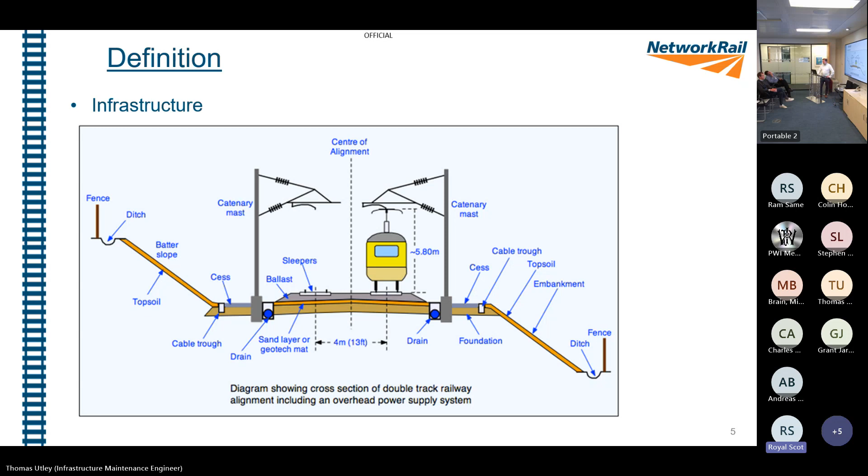So what do we mean by resilience? Well, as you can see, resilience means many different things to many different people. The definition of resilience in the dictionary is the capacity to withstand or to recover quickly from difficulties, in effect, toughness. Now, in infrastructure management, we are very, very good at trying to redefine that.

In the 2007 flooding report, Sir Michael Pitt defined resilience as the ability of a system or organisation to withstand and recover from adversity. As such, a resilient organisation is one that is still able to achieve its core objectives in the face of adversity and for a combination of measures. The UK government, in current infrastructure, defines it as activity to prevent, protect and prepare for natural hazards.

There's another definition, which I got online: resilience to infrastructure may be interpreted simply as robustness of a structure to withstand hazards. However, this introduction sets out and explains a number of interfaces which a narrow definition could conflict with or miss opportunities to reinforce wider resilience within infrastructure systems. So I think the key to understand here is it means lots of different things to lots of different people.

As a customer on a train, with resilience you're really worried about whether the service can run when there's problems and you can get home in the least amount of time. To infrastructure management companies like Network Rail and London Underground, it's really about running a service when things aren't optimal and making sure we can do it safely. So there are lots of different definitions.

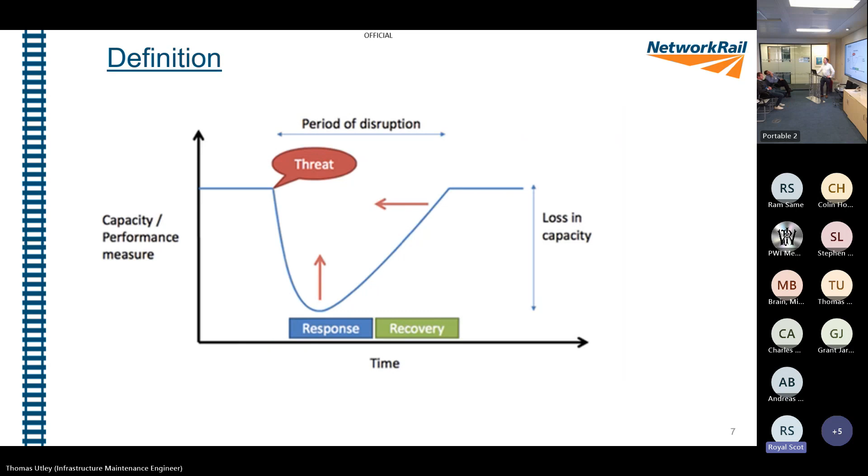Now, this is fine in the short term, but as we'll go on to see, if we do this over and over again in the long term, it does cause you problems, because over a period of time, you see a real decrease. Now, that might not be obvious, but eventually it does cause real problems with infrastructure, and you end up with a big glut of work that you're not planning to do.

So what does infrastructure need to be resilient to? Well, I've tried to come up with some key points. So the key one, and the one that's on everyone's agenda at the moment, is climate change. So we are seeing a huge change in our climatic conditions, and we need to consider not only how the infrastructure behaves in the climate we have now, but how it's going to behave in the future.

There's also natural hazards, so things like large bodies of water, unstable slopes. So again, we manage them now in a certain way. It's important to consider how we manage them going forwards. There's also more left field things like disease. So we've all seen the effect COVID has had on the railway. That's had a real effect on its capacity, and we are still, I think, in the recovery phase of that now. So it's important to consider as a system how we can recover from that.

And also migration. So the way people are living their lives has really changed. So have we got a railway that's really going to survive and can really perform to support that? There's also a number of man-made challenges. So I'll go on to talk about the pain of component failure and how we're maybe not doing as well as we should be with that. And there's some good scare photos later on.

There's the everlasting threat of terrorism, which is really linked to ICT failure and cybercrime. So we are seeing more and more reliance on computers to run our railways and removal of the human element. So that does have lots of benefits, but it also has quite a lot of risk it's imported into the infrastructure. And again, there's the change in behaviours and demand.

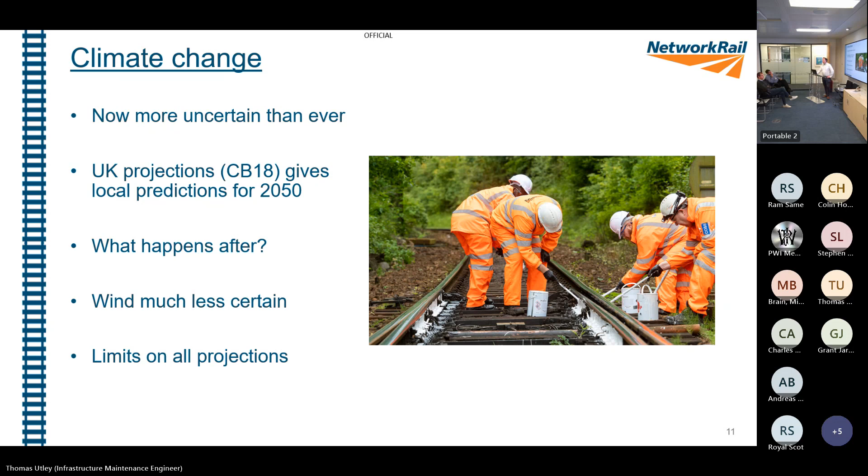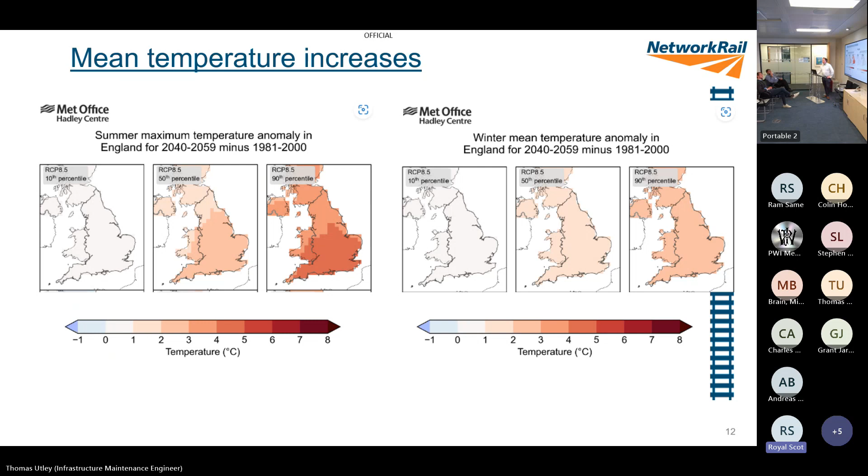And it's the same in the winter. So you can see we are predicting to get warmer, and this is for 2040 to 2059, so 20 years away. It's coming.

And it's the same with rainfall predictions. So again, there is a wide variety of modelling. So there is a model that says it could be quite significantly less in some regions and quite significantly more in others. So the southeast of England in particular is predicted to get quite a lot drier. So that's also going to have a huge effect on how we manage the infrastructure.

So in hot weather, all our assets behave differently. We've obviously talked about the risk to the track and track buckles. We've seen issues with OLE becoming slack. It has a real effect on earthworks as well. So it dries and potentially cracks and dries all the water out of it. And particularly on our patch, we have a real problem with soil moisture deficit.

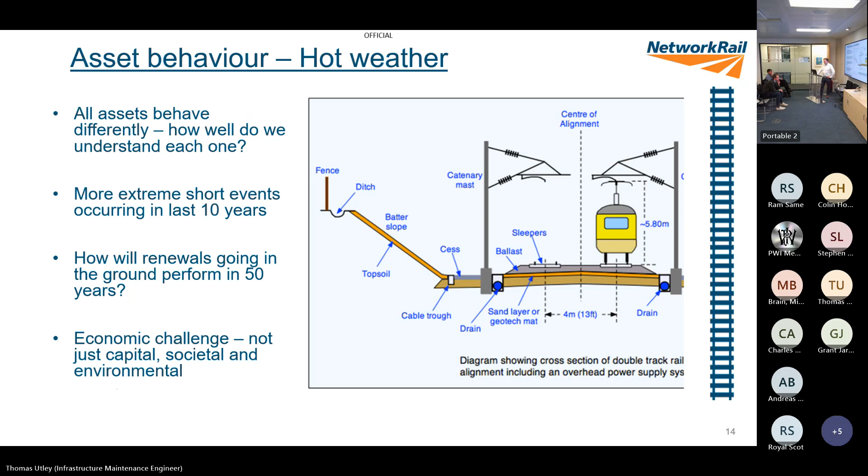So this is on the Hastings line, just outside of Mountfield Tunnel. This is one of my first failures I dealt with in my infrastructure. So we'd had a 10-day blockade where we'd had a direct fixed track renewal in the tunnel. They'd also done some drainage works on the crest of that hill. Unfortunately, this was in November.

They'd laid lots of new turf above the drainage that we put in on the crest of the hill at the top. So when we had this extreme rainfall event, the first thing that happened was, because the turf hadn't had a chance to grow, it washed all into the drains. It blocked the drains at the top of the hill and then flowed all down the embankment, and we had to close the line.

So we are seeing a real trend towards extreme rainfall events, so short, high intensity events. Now, a lot of our drainage isn't designed for that. When I was assistant track manager of the District line, I remember in particular when we used to get an intense rainfall event, a lot of the west of the District line, because of the way it was designed, would go underwater, and the drainage just isn't designed to cope with that. So how can we consider these events when we design drainage of the future?

It's going to require a lot of extra capacity to remove that amount of water, but that obviously comes with the added cost and the added size. So it's going to be very, very difficult to design something that's suitable for short intensity events and the longer intensity events we're used to.

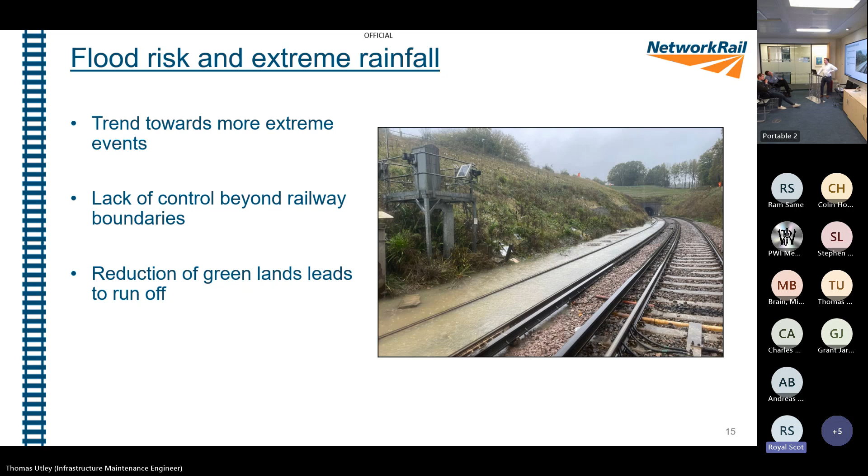So how do we manage these risks? So this is a graph that was put together for the Thames Estuary 2100 project. So this is the project that's considering what to do with the Thames Barrier. So the Thames Barrier was built in the 80s and was considered a good solution in the 80s, but now with the increased flow of the Thames and various other environmental impacts, it's now not suitable, and we're going to have to build something similar. So it's an interesting model to think about.

So the Thames Barrier model, so the blue horizontal line is your current risk. The Thames Barrier approach, where we built this barrier considering that it should remove all of the flooding risk to London, took the risk back down to zero. But then over time, as the risk increases, the risk of failure also increases.

The usual approach we take within the railway is that we do lots of smaller interventions. So, for example, think of these as track renewals, drainage renewals. So they manage the risk for a period of time, and then the work and the capacity they've added is then taken up by the change in the environment. So the debate really is, is it better to do one big project and then manage it over time, or are you better off doing lots of little interventions?

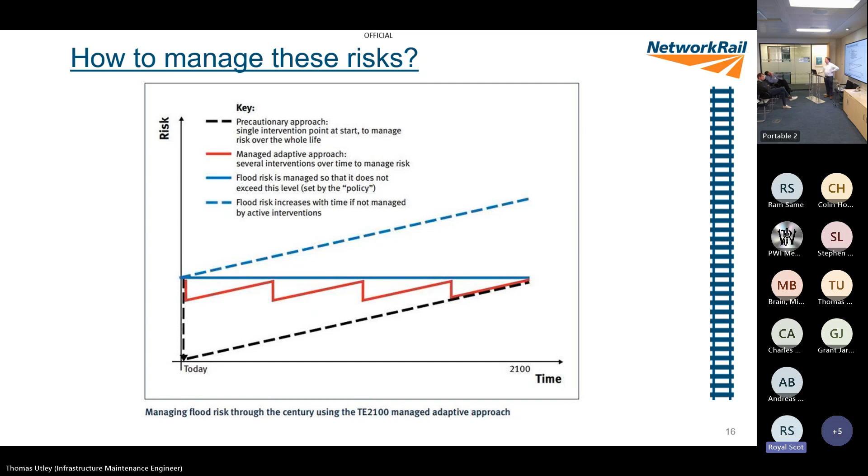It was also the bane of my life when I was a teenager, because whenever you made plans to meet anyone anywhere outside of Newton Abbot, you could bet that the sea would be rough and the train line would be cancelled. You'd be confined to the delights of Newton Abbot.

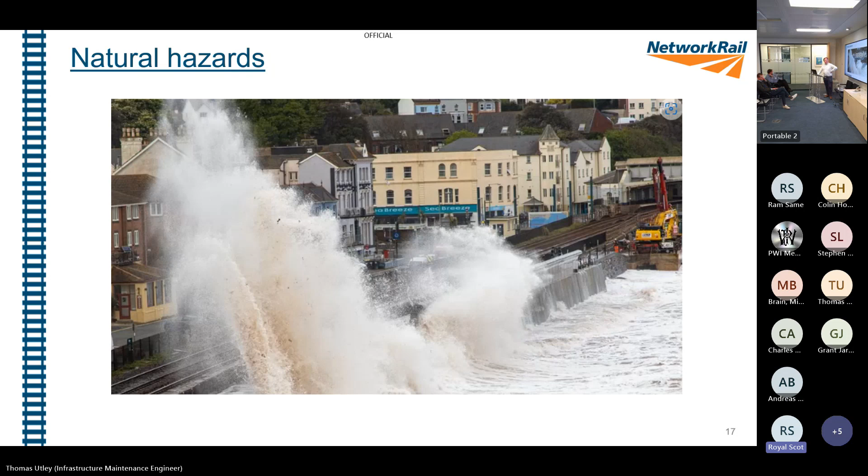So what do we mean by natural hazards? So large bodies of water, mainly the sea, but also things like big lakes, unstable slopes. Vegetation is now a real challenge for us. So vegetation is also something that's not been particularly well managed over the years. With the changing climate, we've now seen a real growth of vegetation, and now there is a huge work bank of vegetation that needs to be cut down.

It's a particular challenge for trains that are out of gauge. For example, we have a Nissan train that comes from Germany twice a week that goes from Folkestone through the Channel Tunnel up to Stoke. We had the owner of Nissan, or someone from the Nissan board, come and present to us at our recent leadership event about how much damage we were doing to their trains.

So because the train is out of gauge, we have a lot of vegetation that collides with it, and it surprised me how much damage it actually does. So I think something like 200 odd cars have been written off on that train just by it colliding with vegetation. So you can imagine the amount of refunds we've had to give them.

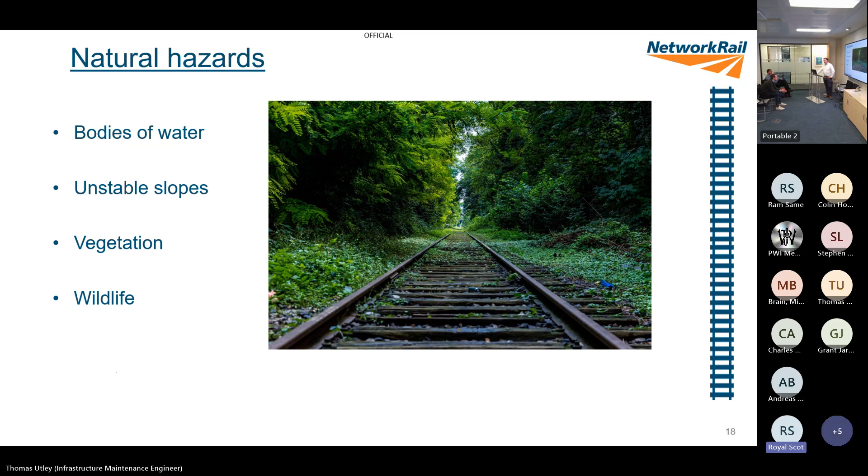Wildlife, in particular in vegetation, is also a real challenge. There's now a real legal responsibility to manage the wildlife there safely. So things like dormice and great crested newts now have real protection, and there are now real legal implications that a lot of the time stop you managing the vegetation effectively.

So I'm sure you all remember this. So this was in the great storms of 2014. So the sea got so rough that eventually it washed away the seawall at Dawlish, which I think was built by Brunel, or it might have been a slightly later version, but it had been there for a long time. It then washed away the track, and it left us with the world's biggest slack.

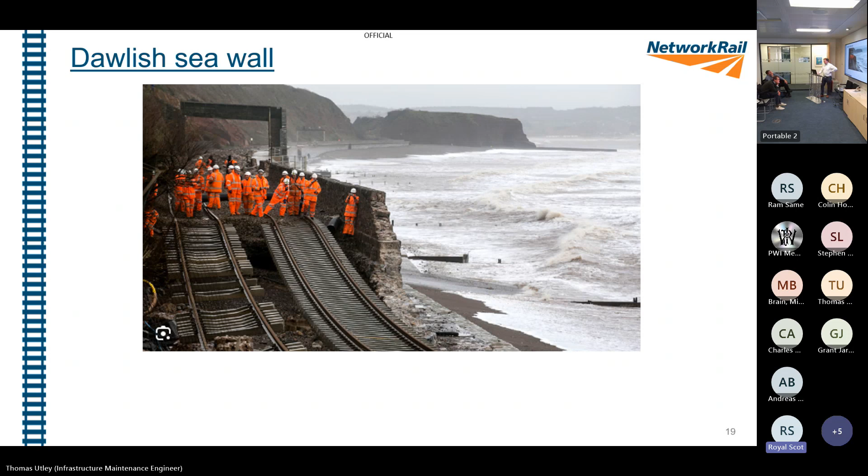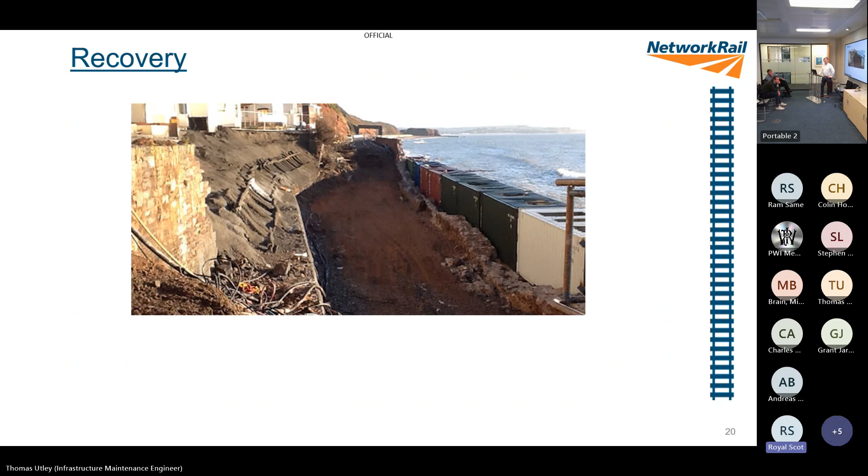So Network Rail did a fantastic job of recovering it. So they built a sort of temporary seawall using shipping containers. Then they had to completely rebuild the railway behind it. So they've now built a huge concrete retaining seawall. So this has, in their mind, removed the risk. But is that going to be suitable for the sea state in 50 years?

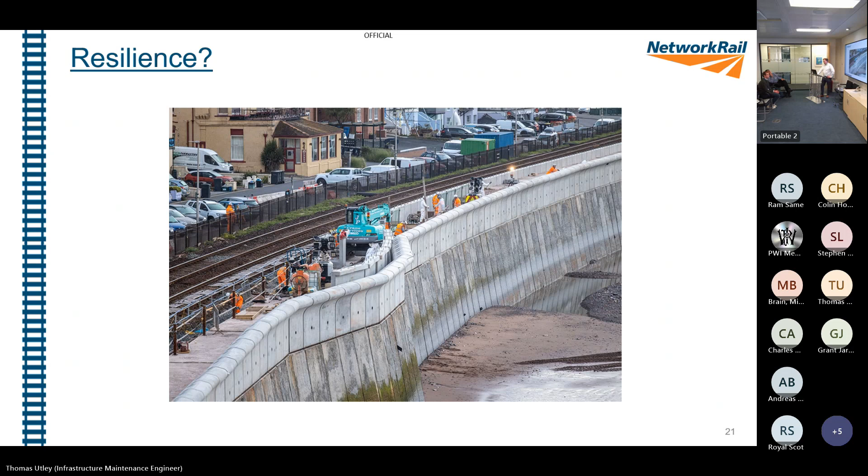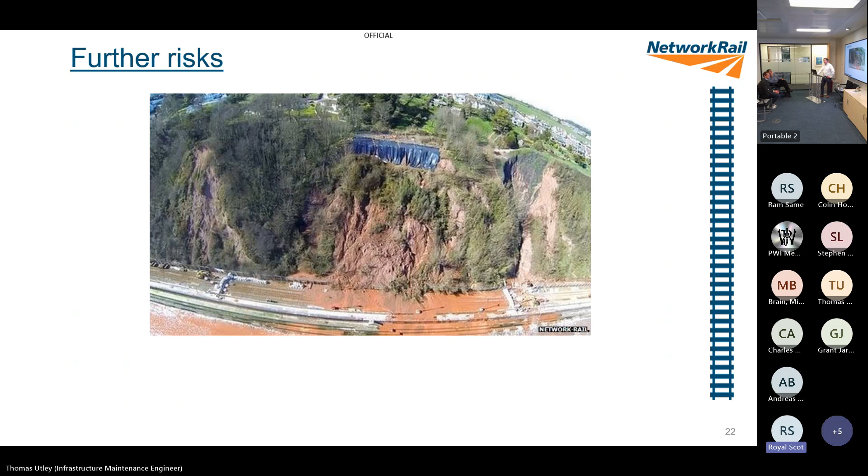There's also the chalk cliffs and the clay cliffs behind them. So there is a real risk of landslide, which they've dealt with for a long time. So they've done a lot of cliff stabilisation works, and they've also built a lot of covers. Anyone like to hazard a guess about how much that's cost? 350 million. It's a bit less than that. If you include the seawall and that. So that was £80 million spent on that in total.

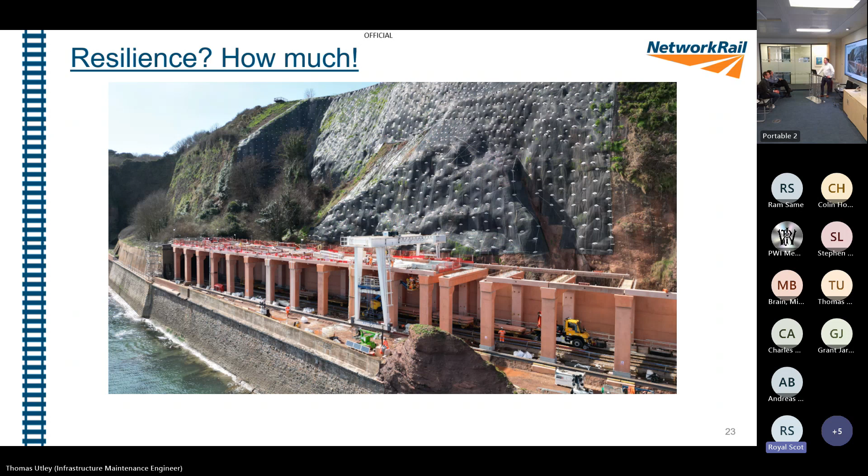So that railway is fantastic. It is a real relic, and it is a real tribute to Brunel. Is it a sustainable solution? So there were several proposals about rerouting the railway, which were eventually dismissed. So the cost estimate of this was in the hundreds of millions. So if you balance that against the £80 million we've spent just on securing the cliffs, it suddenly becomes a lot more of a financial decision.

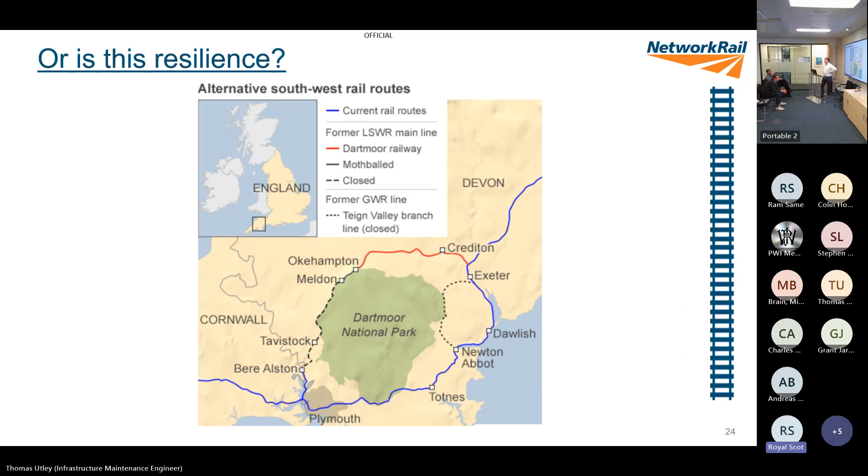So it's also worth noting the railway to Okehampton has been reopened, and I think there are also proposals to open the railway to Tavistock. So over time, there would only have been a short leg that would have to be built, and that would have been a lot more resilient to all these weather problems than keeping this line open. It is important to keep it open if we can, because obviously it serves all the coastal communities. It's important to tourism. But was that the right thing to do? Was that the resilient solution? I don't think it was.

There's then also the effects of disease and migration. So I think we're still really yet to feel the full effects of COVID-19. We're still very much in the recovery phase. It's also a horrible thing to say, but I think in my lifetime we probably will see a similar pandemic. With the way nature is kind of mutating and the stress we're putting on the environment, I think it's more likely than not that we will see an almost game-changing disease, which is a horrible thing to say, but looking cold, it is quite likely.

So since COVID, we've seen a rise in longer, less frequent commutes. So people generally now come to the office 3 days a week. And there was a real trend during COVID of people moving further away. So the metro railway we have was designed to get lots of people into London in the morning and lots of people out of London in the afternoon. Now, Monday and Friday, that's no longer a challenge because they're like ghost trains.

So that change in demand has led to changes in maintenance. So we're now considering things for the first time, like daytime closures during the day when the railway's not being used. There's even areas of the country that are considering engineering works on a Monday because that has become the lowest day of demand and people are a lot more keen to use the railway for leisure than they are for commuting.

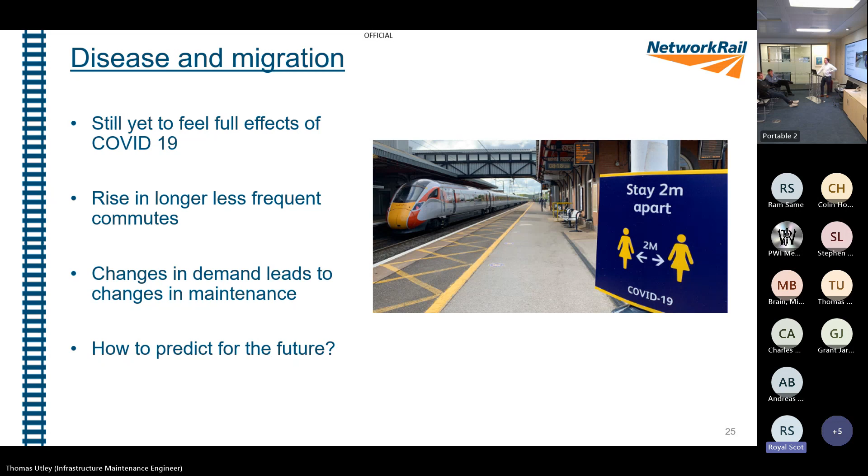So that's obviously been a real step change in how our users have used the railway. How are we going to prepare for the next one? Because there will be change again. So what can we do to improve resilience? Well, there's two real approaches. So you've got your hard approach, which is going and doing physical works. So this is things like engineered defences, so building more capacity into your drainage, that kind of thing. So that works really well for new works.

We have a lot of tunnels and a lot of infrastructure that's almost over 200 years old. Very, very expensive to do it to a 200-year-old tunnel versus putting something new in the ground. So it's really important to consider through the design phase. So can we build in extra redundancy without making it crippling financially? And can we consider resistance where possible? So this is really important with things like flooding. So can we avoid putting anything in a floodplain? Can we avoid the risk of that?

As I've talked about as well, investment in maintenance activity is important. So I think the resurrection of the management of off-track and drainage gangs has seen a real improvement in how we manage this. And also investment in relevant research. So a lot of railway technology is very old. There's lots that can be improved in it, and I think it's important we look ahead to that.

Then there's a soft approach. So in my opinion, this is really learning to understand the problem better. So there's technological elements of this, e.g. better weather forecasts, more reliable forecasting. That then improves your understanding and communication of your infrastructure. So if you understand the problems with your infrastructure more, you can come up with more efficient solutions and you can communicate to the users when we don't think it's going to be able to work. So we are slowly getting better at this. It is still a problem.

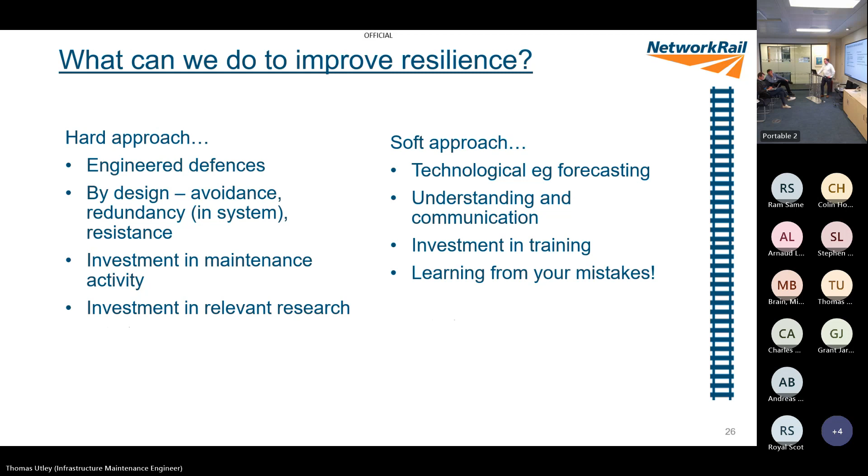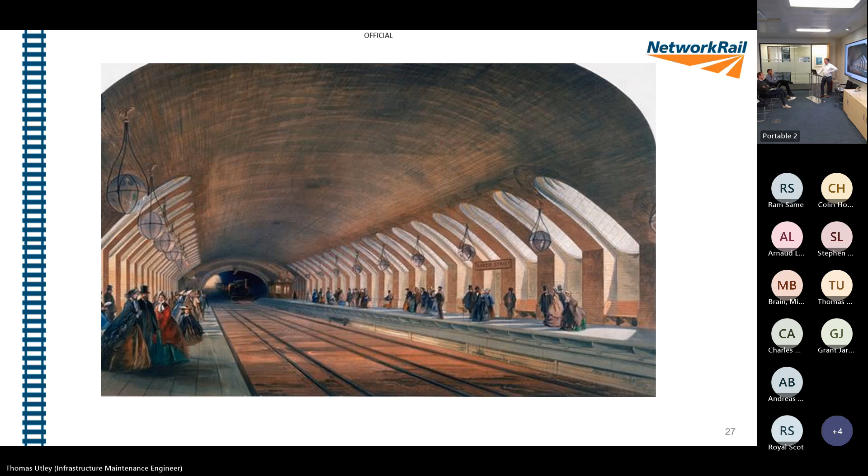So as engineers, we are fantastic at solving problems. Designing new assets when you consider resilience is very easy. It's much, much harder to consider when you have existing assets that are already, in some cases, centuries old. So we need to build capacity and understanding in the kind of short-term world.

So in Network Rail, we have control periods. So we have 5 years of guaranteed funding. There are other railways I've worked with where we've had much less than that. So it's very hard to plan for the future and build in resiliency when you only have a budget till the end of the week.

So obviously economics is key to the efficient running of a railway, but it's very difficult to reflect the true whole life cost in this. And when you consider things like resiliency at the start, it's often engineered out as cost savings. So it's very, very difficult to justify. But are we considering the cost over its full life? I don't think we're very good at that at the moment.

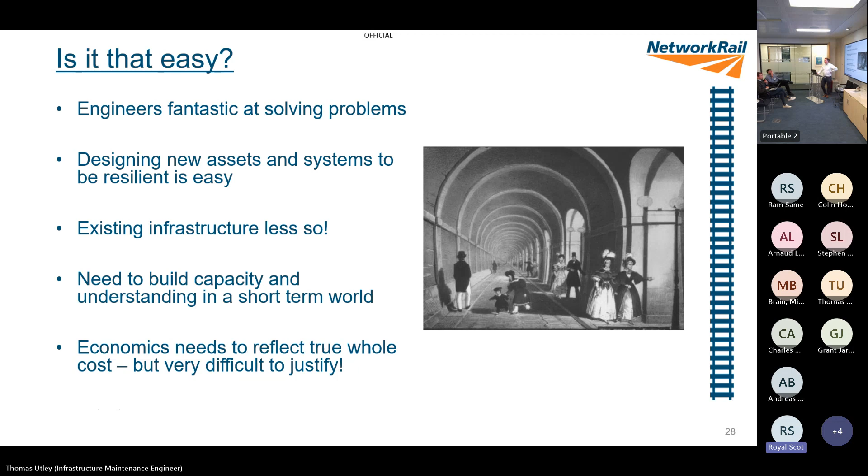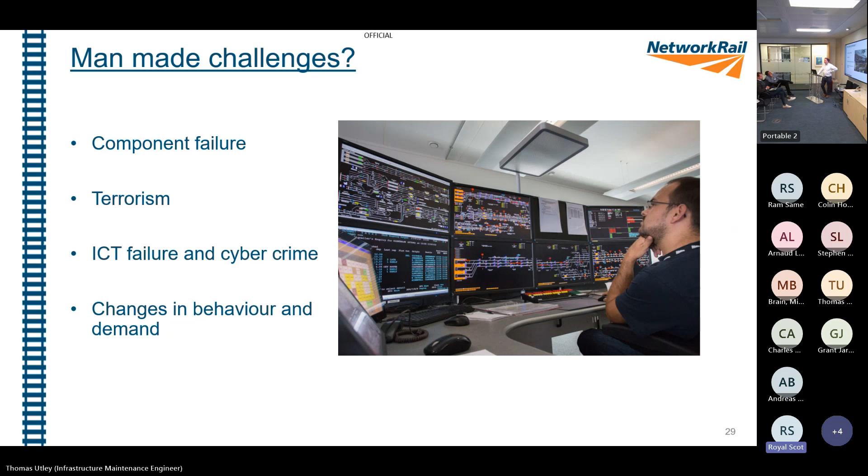The top one happened last week. So this happened on Wednesday, a week ago. So this was going into Stewart's Lane Depot, where GTR keeps all its fleet. It's also the key route for our £8 million Voltaire Road renewal, which is happening over Christmas. I mean, Justin have been frantically running around trying to find a new crossing for that.

So the key really when you have component failures is still being able to run a service when things go bang. So with a lot of railway components, they are very resilient. There's lots of temporary repairs you can do. As a maintainer, we really struggle with cast crossings. So cast crossings are fantastic when they're installed. They're fantastic throughout their life. When they go bang with little or no warning, they are incredibly difficult to replace.

So if you have a spare, which is generally not the practice now, you need an RRV and an army of men to install it, whilst with a fabricated crossing previously, you only needed a couple of iron horses and 4 or 5 staff. If you don't have one, lead time's 18 weeks, generally. I don't think the public are accepting of having a railway closed for 18 weeks.

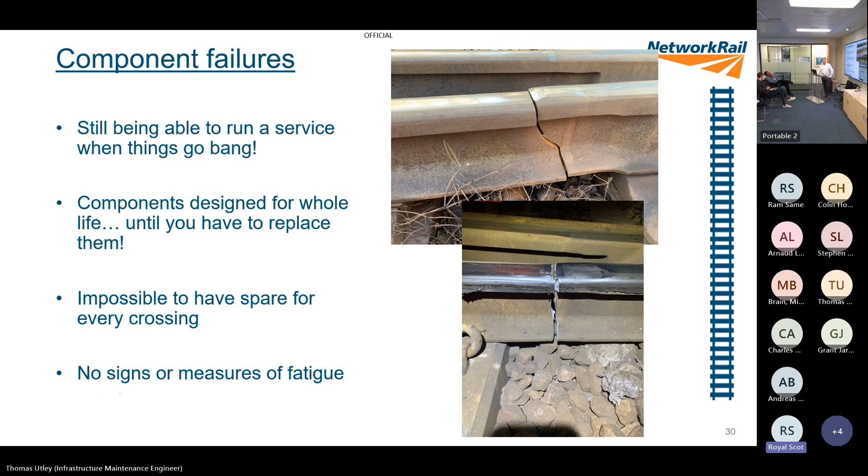So this was known as the Lee joint. So the supervisor that put it in was so proud of it, he wanted to name it. So what we had to do in this circumstance was we had to cut out the Tri-Metal Zone where the rail had broken, butt up a plain rail to it, and then put this rather exotic clamping system in place. So this is 2 plates secured by a clamp at one end. To give it some stability, we put an old sleeper under the other end and we secured it with some pins.

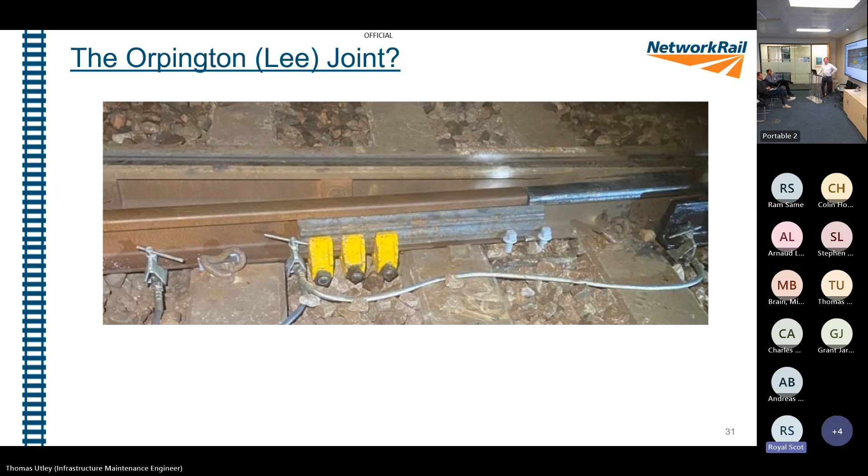This is the level of first principle engineering we've had to go to just to reopen the railway. So what do you think it looks like under load? You might be pleasantly surprised.

So this was taken by a new trackside camera we're trialling, which detects movement of every train, so you can monitor it without being on site live, which I think is very impressive. So for such a Heath Robinson solution, I think that worked pretty well. We still had to live with a speed of 5 miles an hour, and we agreed we'd check the clamps under a line block after every train. But it did get the service back up and running. But should we be having to consider solutions like that with such modern componentry?

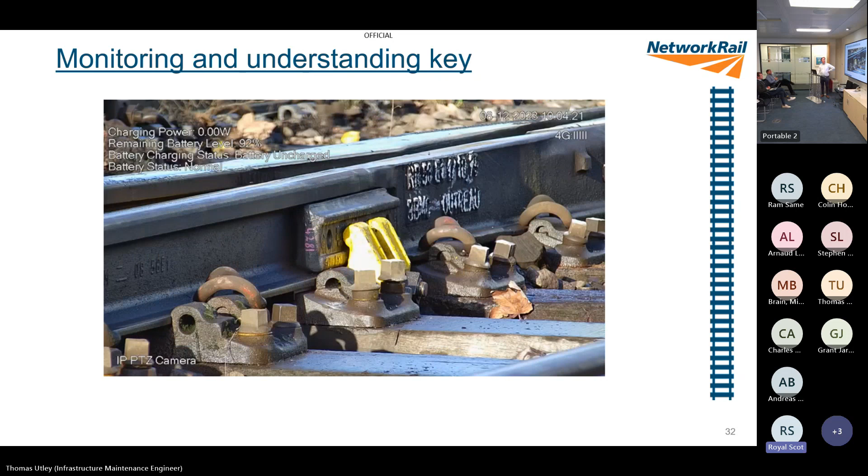So maintainability is often really neglected during the design stage. It's very hard to consider, and it generally, as I said, is engineered out as a kind of a cost saving at the start of the project.

It's also worth noting, I did a 4-year Master's Civil Engineering degree. I must have had 400 or 500 hours of lectures every year. I don't think I had a single hour on how to maintain anything. It was all about construction, and it was all about new works.

We have very, very little formal education in the UK about how to maintain things, which is kind of mad when you think about how much existing infrastructure we have. So I only really learned to start maintaining infrastructure when I went to work for Tom on the Piccadilly line. So it's really not a well considered fact, I don't think, throughout the whole design life of infrastructure.

So flexibility is key. As you've seen there with the cast crossing, we were kind of left with that solution, which did allow us to run a service, but it had a massive effect on the capacity until we could replace the crossing. We really need to be considering at the start of the project and as part of any design, if it goes wrong, can we fix it with the existing tools we've got, or what do we need to put in place to try and help us fix it?

So this is where relevant research to improve asset life is really important. There is lots of work going on, and I've been involved in a number of trials of exotic rail technologies, some of which have been successful and some of which haven't.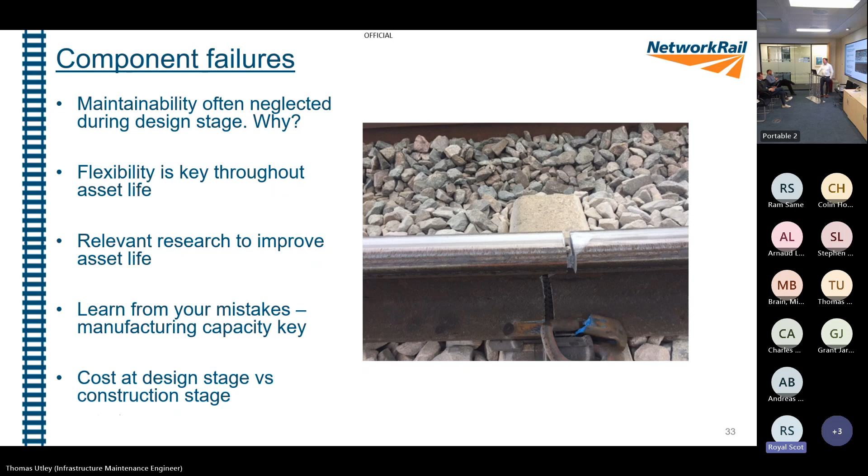Resilience. So it's key to think about the cost of making these changes at the design stage versus the construction stage. There's also a real consideration now of terrorism and cybercrime.

Does anyone know where that is? So that's the Highgate Control Centre on the Northern Line. That was designed and opened shortly after the 7/7 bombings in the early 2000s. So there was a real fear of more attacks on infrastructure then. So it was built with that in mind, and that was the real overriding consideration.

So one thing to consider is to what extent can you design out the risk of terrorism? Now, you're never going to design your infrastructure to withstand what you consider from previous infrastructure attacks, such as 9/11 or bombs. But what can we do to try and reduce the risk of these things happening? What can we do with existing infrastructure? That's even more difficult. We have lots of 200-year-old tunnels and earthworks.

We're also now increasingly computer controlled. So are we adapting our approach to address this? It's a very difficult problem. I think anyone that managed to hack our filing system would struggle to find anything because it's so archaic. But there is a lot of sensitive information, and there is a lot that can be gained by someone who maybe has the wrong motivation by accessing these things.

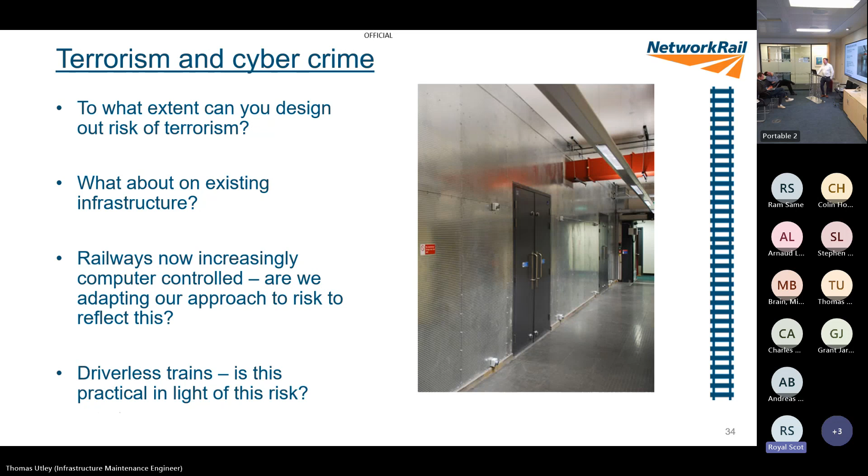So then there's also changes in behaviour and demand. Again, as I said, we've almost seen an end to rush hour, and we now see a more constant demand, particularly at weekends, for leisure and travel. Track access has now really become the limiting factor for maintenance. It is a real challenge.

More and more operators want to run more and more services, and particularly at night is a real challenge. Trains are being planned later and later, and we've seen the introduction of Night Tube on the Underground. How does this balance out versus the time the maintainer needs to maintain the track and the infrastructure?

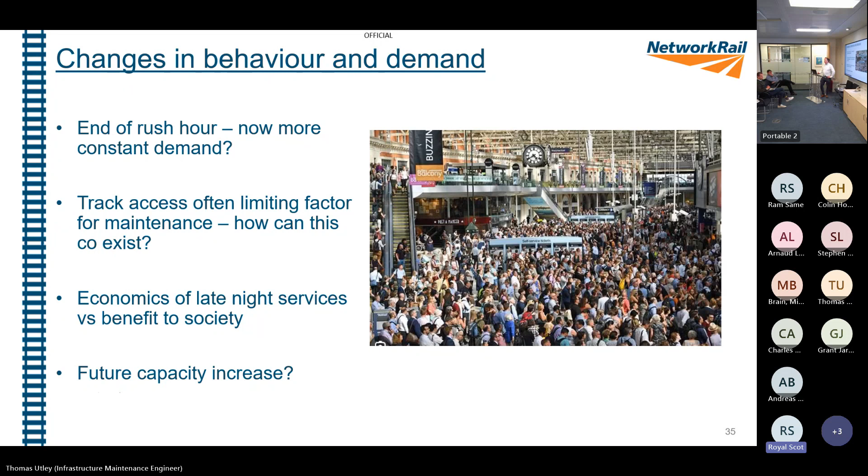And we've obviously seen the cancelling of HS2 north of Birmingham. If there is any future capacity requirement, how are we going to consider the increase? It's going to be very, very difficult because our existing infrastructure is at capacity.

So the current key guidance now is ISO 14090, which is all about adaptation to climate change. This was released a couple of years ago. So it's designed for any organisation to try and adapt their approach to climate change. So if you run a cricket club, if you run a football club, or if you run a railway, it gives you different levels of advice.

So again, it emphasises the importance of thinking as a system rather than about individual assets, and thinking about how the different assets interact with one another. And there's real guidance on adaptive capacity and dealing with the uncertainty of climate change and trying to develop a better understanding of climate change.

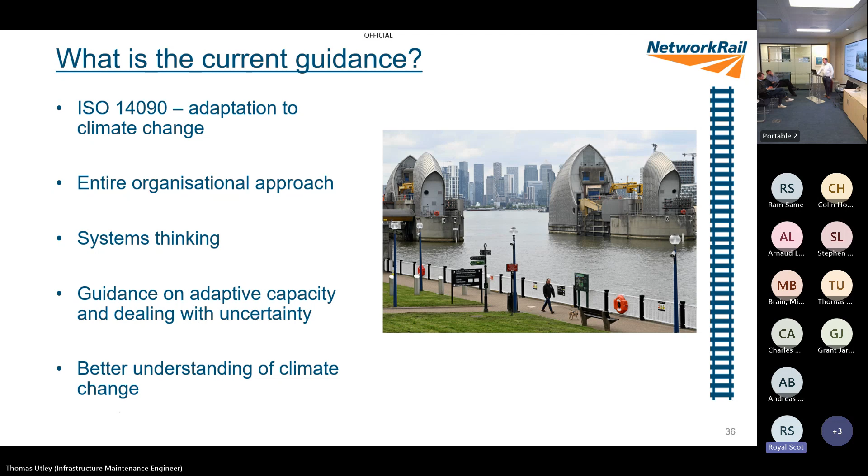So how can we improve? I don't know how many people here are fans of Formula One. Formula One's obviously a very technical sport. They have very high-tech cars that are highly monitored. They monitor something like 12,000 different individual things about the car. The engineers that sit on the pit wall, I think, only look at something like 40 of them. So there is a lot of monitoring, and that has given them a much better understanding of the cars.

They've also managed to develop a lot of predictive tools, which gives them a much better understanding of how to win the race and what the deciding factors are. So that tells them when to have a pit stop, how much fuel to put on, that sort of thing. So having that data and that knowledge of your asset has really helped make those cars such high performance. That's a real approach that I think the railway could adopt.

So the real key, I think, is better understanding of the problem. So effective key monitoring and being able to process the amount of data we generate. There is a huge amount of data we already collect. We're reasonably good at processing it now, but it is a real challenge to get it to a state where we can recognise when it's saying we've got a problem.

And there's also generally very poor historical records kept. Most infrastructure failures are generally repeats. It might be over a few days, or it might be over 5-10 years. We have nothing at the moment that says this happened 10 years ago and this is what we did, this is what fixed it, this is likely the problem.

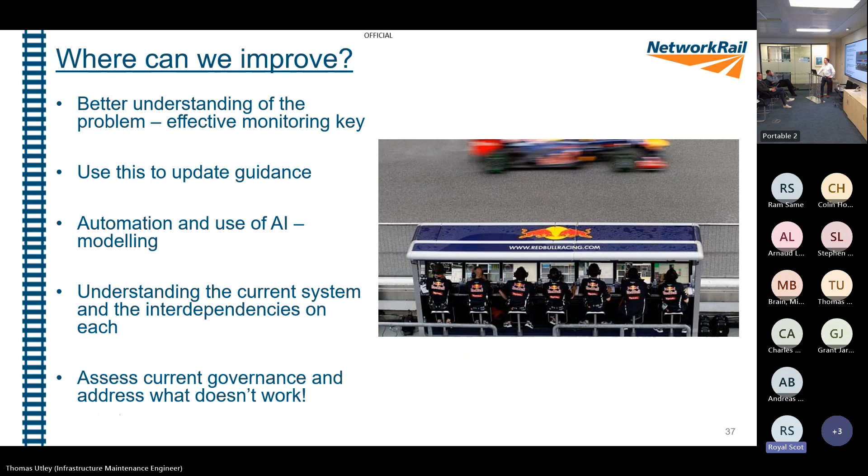So we also need to develop a better understanding of the interdependencies of all the different systems and what we should be doing and what has the most benefit, so we can prioritise the best work to do. And again, key is learning from mistakes: we need to address what currently doesn't work and learn from the mistakes.

So someone has come up with a model for the railway. In their mind, there are 7 different subsystems within a railway environment. At the top there, you have the different people who control it from a high level: the TOCs, the management companies, and the ORR. To the right of that, you then have the financial element of who funds it. Then you have the element of ticketing and how that works and how that interlaces.

The green or eye-shaped one in the middle is all about your infrastructure and the people who use it. Then to the left here, you have all your hazards. And finally, at the bottom, there's more about infrastructure management. All the different arrows show all the different dependencies. I'm sure you're as confused as I am looking at that. It's really hard to understand what has an effect on what, and I don't think we really have a good understanding of that yet. So developing that is key.

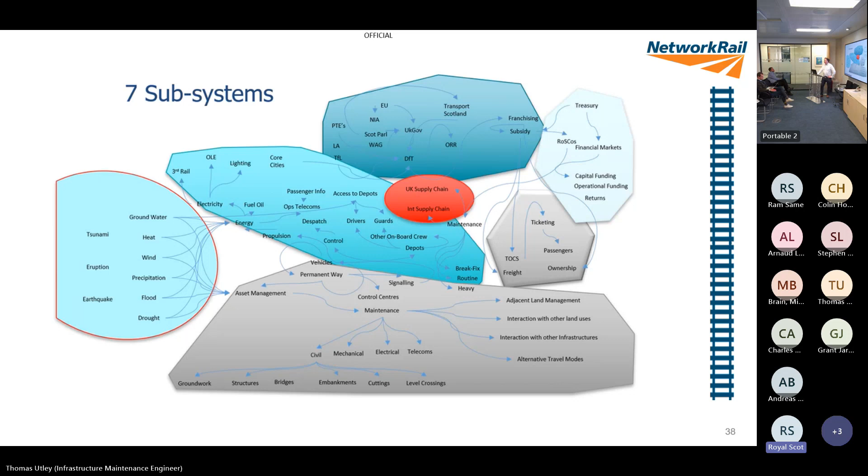So if we think about the financial challenges, future generations are going to need to pick up the cost of 200 years of industrialisation. So do our current investment rules reflect this? How can we drive the right long-term decisions that I've talked about in a short-term investment environment? And how can we change our performance metrics to reflect this?

So in Network Rail, we use delay minutes. Delay minutes generally has no reflection on how many people are on the train and the other kind of effects it's had.

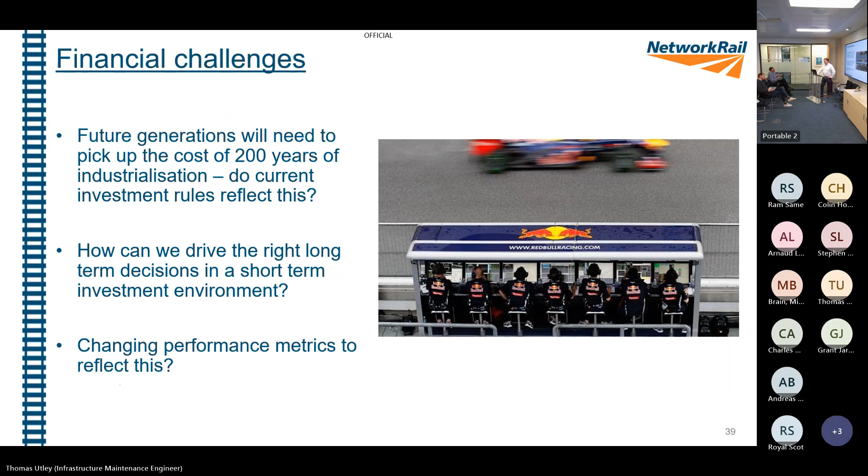So, do you think we're doing enough to ensure that future generations will have a railway fit for these challenges? I'd like to open that to the floor. Thanks, Tom.

Tom, let's throw a couple at you of people effectively trying to make things worse. One of them, Network Rail has actually done work on to stop it happening. But going back about 20 years, there was a new approach. It must have been the time Eurocodes were coming in for structures design. And there was a session at the ICE on the new guidance, the new design codes and whatever.

And I commented about the fact that for bridges, it didn't deal with making sure they didn't become roosts for pigeons. And it was interesting because the designers didn't think it was their job. There was quite a violent verbal pushback from bridge designers. You know, that's not our problem. Well, of course, it is their problem. It is a problem they are creating. Network Rail's design standards now very much include that as a feature to design out for structures, which is good because the message has obviously got across.